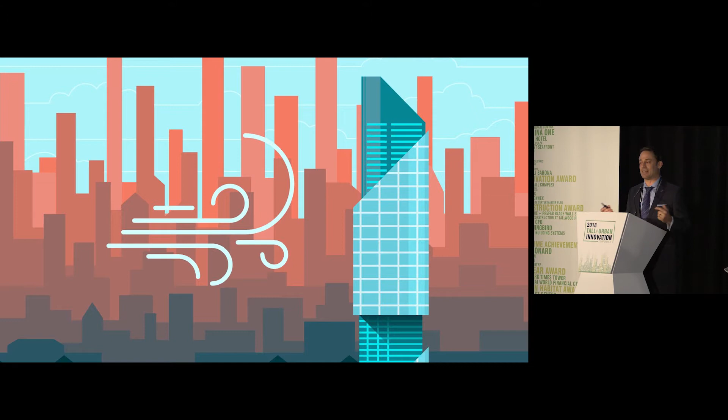Now, any structural engineer here can tell you this isn't principally a safety issue. These large buildings are actually designed to handle a fair bit of displacement. But it certainly is a human comfort issue. And the last thing that you want is for the person who just spent millions of dollars for your penthouse suite to not be able to live in it because of motion sickness.

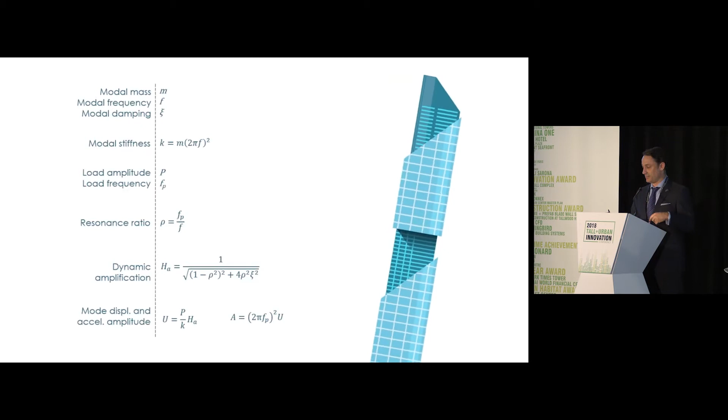So the physics behind this, the motion behind these buildings' movement is extremely well understood. This is a well-studied phenomenon. And there are very reputable firms who specialize specifically in wind engineering and designing damping systems for tall buildings. If anybody wants to get into the weeds of specifically the physics on how these systems work, I'm going to recommend that you speak to our partner, RWDI, who is our wind engineering partner helping us bring Hummingbird to market.

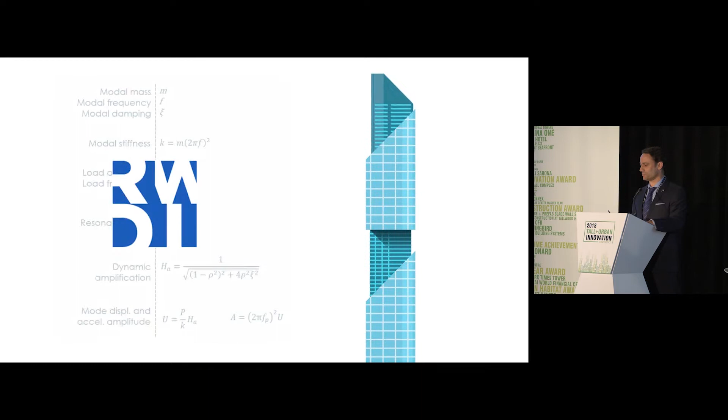Let's talk a little bit about what the result is of all of this work. So you see the building on the left is an undamped building, and it may move quite a bit around a specific frequency in a wind event. On the right, you have a damped building where the motion of the damper itself actually clips the acceleration of the building around that particular frequency. And this is the fundamental intent of damping. As you can see, you end up with quite a bit less displacement or movement on the building that is damped. The intent here ultimately is to make it imperceptible to any of the building's occupants.

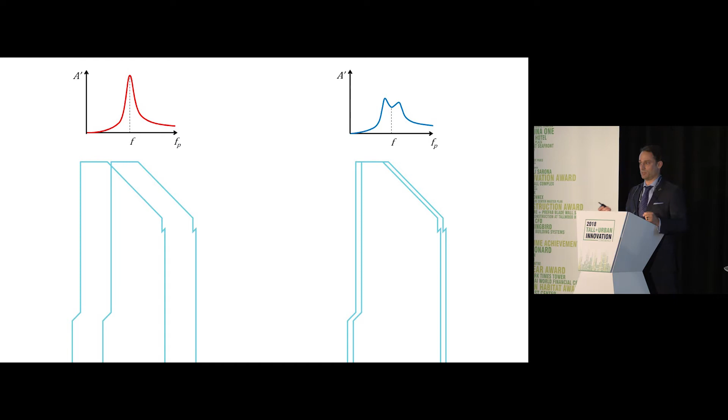So there are currently two main types of damping systems, passive damping systems, I should be very specific. On the left is a tuned mass damper, which is in effect a very large pendulum that sways counter to the motion of the building. On the right is a tuned sloshing damper. There are a number of types of tuned sloshing dampers, but this system uses the motion of water to actually accomplish the mass damping. The Hummingbird is an evolution of a tuned sloshing damper.

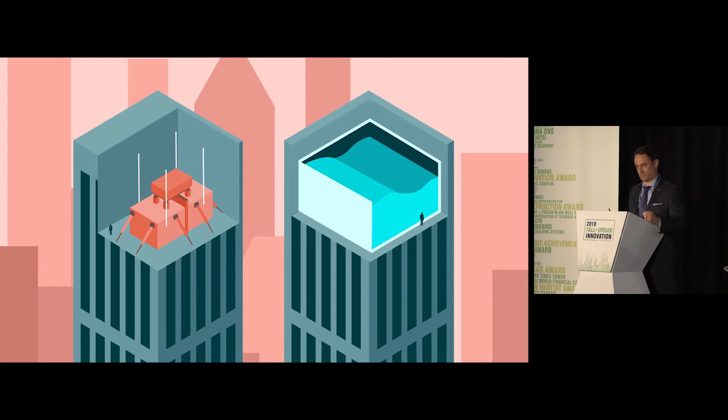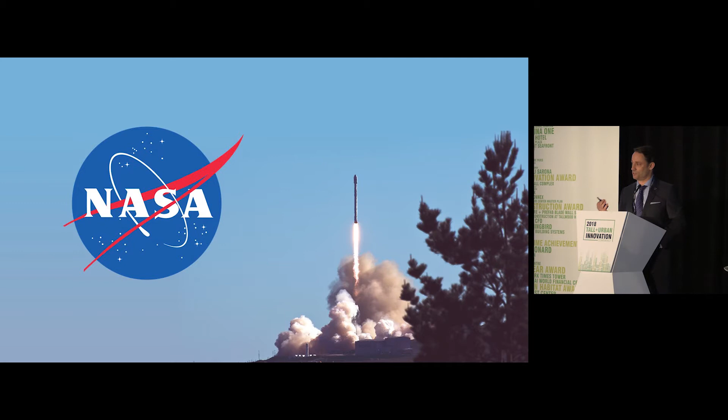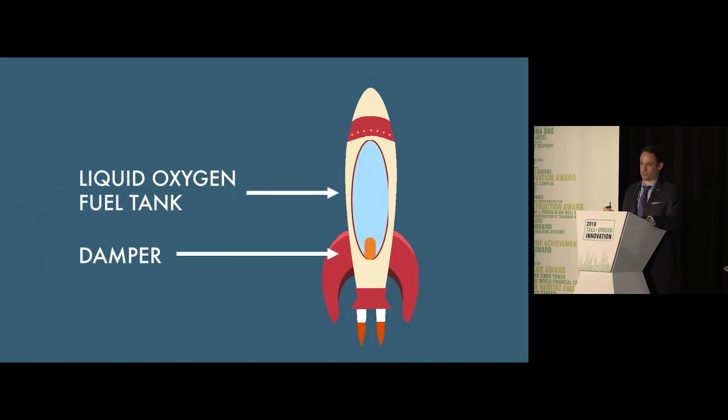Now let's talk a little bit about how it came about. So when NASA was developing the Ares rocket, they ran into a vibration problem. Specifically, launch vibrations that would kill the astronauts. Now, as you might imagine, this was not a desired design feature. So they also knew that the liquid that's inside of that oxygen tank would move out of phase with the vibrations of the rocket itself. And so they designed a damper to take advantage of that particular fact. But to test it, they didn't want to spend $50 million a pop launching a rocket.

So when NASA had pushed the design as far as they needed for their purposes, they looked out to the industry to see if there were any experts who could help them or who would be interested in taking the design and bringing it into the commercial markets. Thornton Tomasetti, who's obviously a very well-respected engineering firm with deep experience in the space, and particularly with very tall buildings, responded with interest and made a number of adaptations and improvements to the design so that it would work on an actual building.

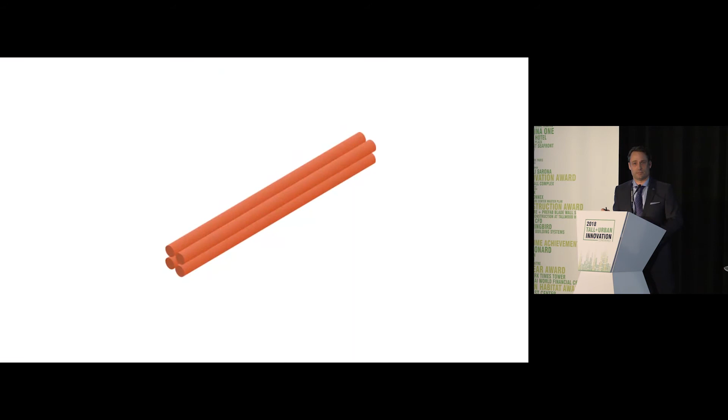Which brings us to today. As I mentioned earlier, Hummingbird is an evolution of the tuned sloshing damper, specifically the tuned liquid column damper. At its most simple configuration, the Hummingbird is a water column inside of a pipe with an air spring on one end. You can group these pipes together to create a damping array, and you can group these arrays together to create a large mass tuned damping system.

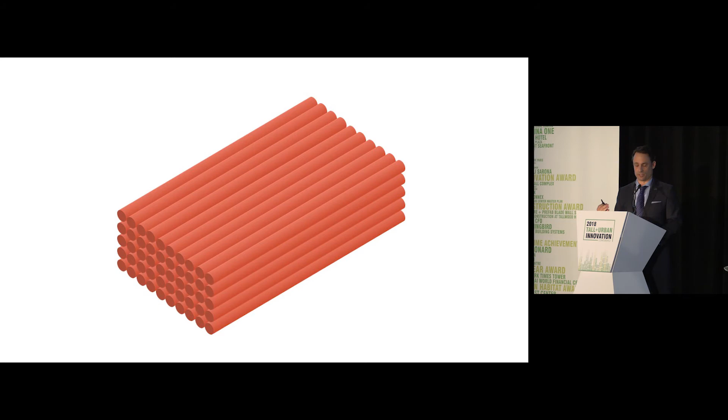This modularity has several significant benefits, and we'll talk about them. First, because it's not a single damper, it's actually a grouping of a number of smaller dampers. This system is extremely redundant and resilient. There is no single point of failure. If one of the dampers goes out, its impact on the overall system is effectively negligible. So that's a key benefit to the modularity of the system.

Second, they can be made quite small. The single unit damper itself can actually be quite small. And what this means is, it is one of the first really practical solutions for damping existing buildings post-construction. It can actually be retrofit and fit into an existing building to help reduce motion post-built.

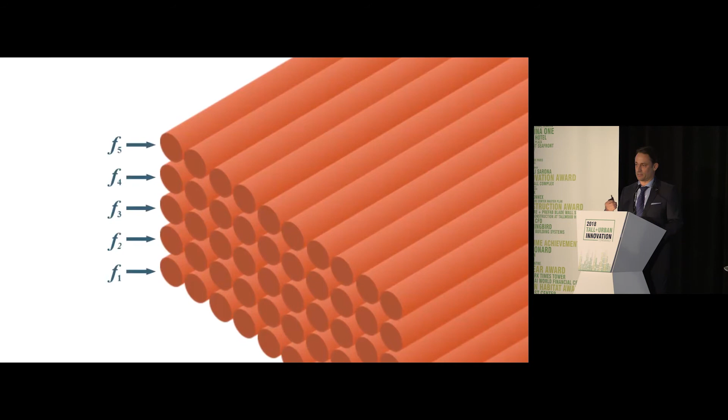Third, there's some interesting effects that you can get when you spread tune a system, meaning if you tune the damper around the natural frequency of the building. In aggregate, the impact of that is to make the damper more efficient. For our purposes, it means smaller and less expensive.

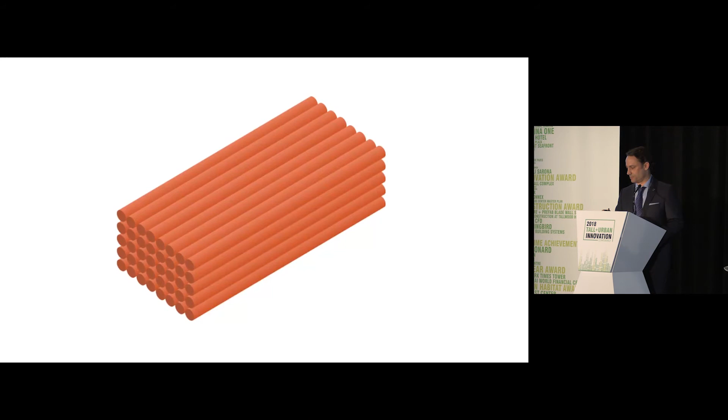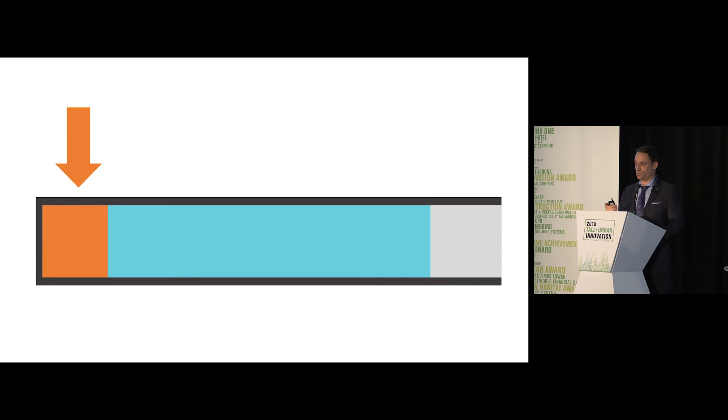So let's describe at a really high level how the Hummingbird works. Inside each pipe, as I said, there's a column of water, and at one end, a sealed air chamber, shown here in orange. That air chamber is sized specifically to the frequency of the building. As the water column moves into and out of that chamber, this compression and decompression of the air chamber resists the motion of that water column. This is what is meant by an air spring. This action in aggregate is ultimately what dampens the motion of the building overall.

A quick note, I'm sure many of you will notice that water does not like to maintain a perfectly vertical interface when set against air. So a part of the portfolio of patents on this particular product is how that water-air interface, that barrier, is maintained. So the air spring itself is a pretty significant innovation.

Traditional sloshing dampers have very strictly controlled dimensions. And this is because the frequency of the building is what determines the length that that damper has to slosh. The air spring decouples that relationship. And so you can actually create, within reason, any length damper and still tune it to the frequencies of the building. What this means from a design standpoint is that you have an enormous amount of flexibility around how you would lay out and position the damper in a building.

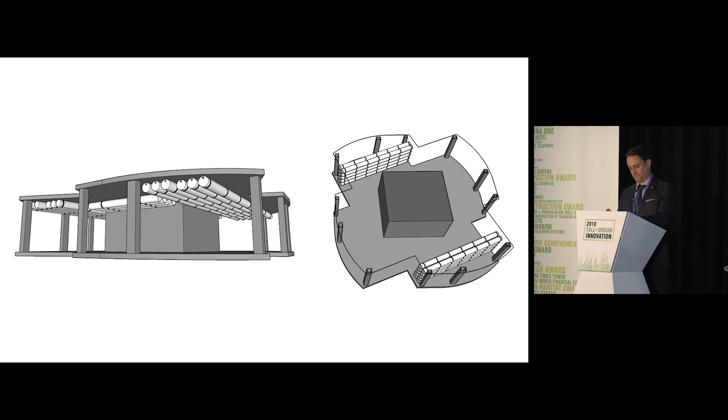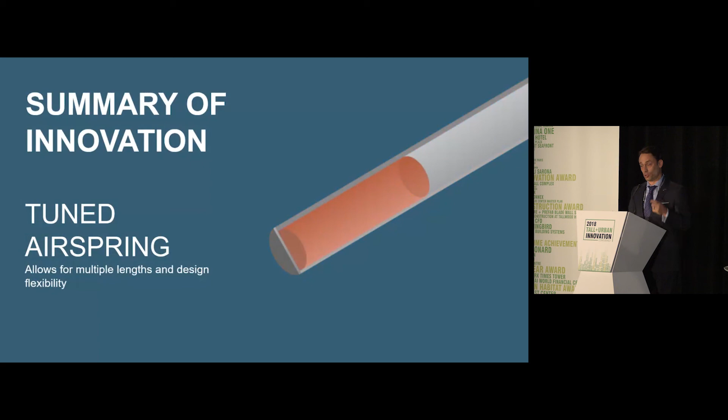So let's summarize some of the key innovations here. All right, the first is this tuned air spring. At the end of the day, it just allows you to design the system in multiple lengths, which gives you an enormous amount of flexibility in layout. The second is this vertical air-water interface, which removes the upturned ends required of traditional tuned liquid column dampers. And that ultimately means that the Hummingbird is shorter and requires less vertical height to accomplish the same damping effect.

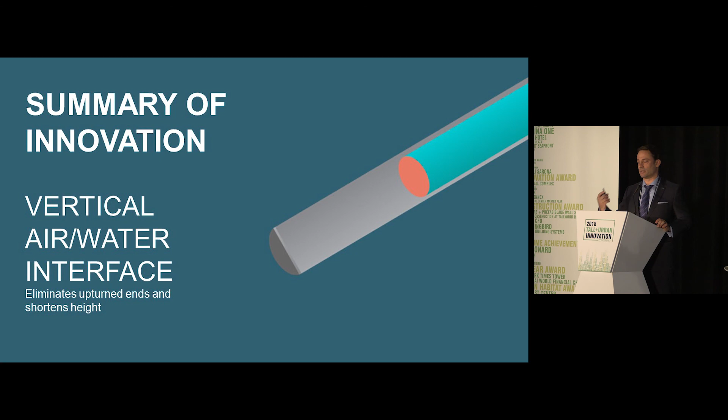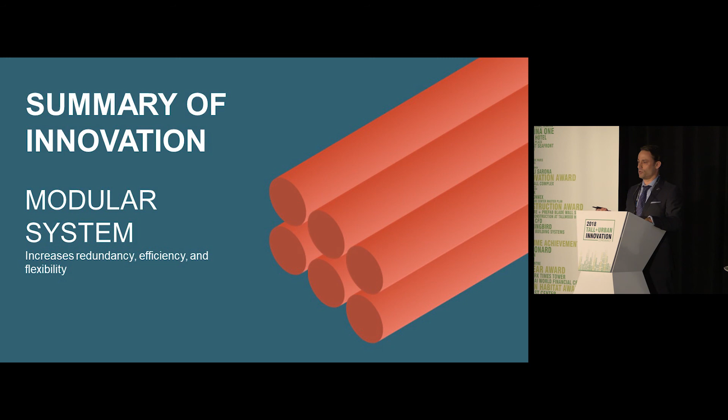So the big so what, right? What does this mean for a building owner? At the end of the day, it's more flexible. If there's anything that I've learned, design flexibility will make the architects happy, and if the architects are happy, everyone else is happy, right? It's more resilient, no single point of failure, and it's capable of handling anything that gets thrown at it.

And then lastly, this is a lighter system. There aren't large concrete or steel tanks, and there aren't large point masses like there are with traditional tuned mass dampers, right? So this is both lighter in aggregate and significantly lighter per unit area than other dampers that are out there. And what that fundamentally means to a building owner is that you need less structure to support the gravity load. And so that is Hummingbird Kinetics.